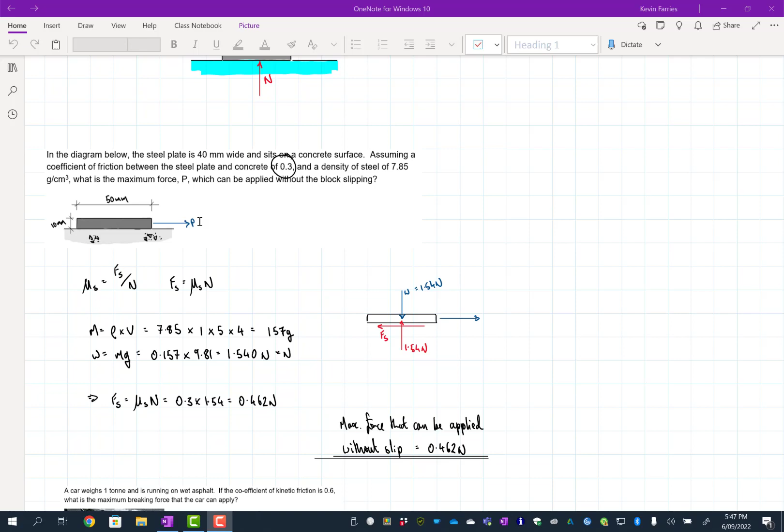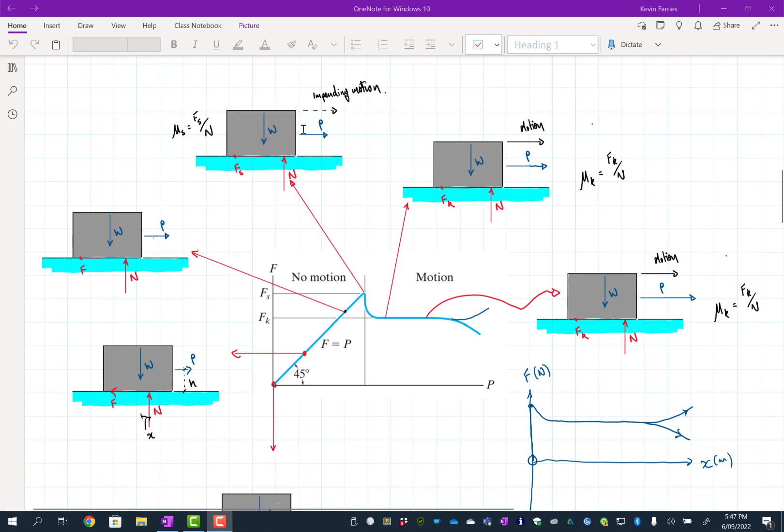So in the examples we've looked at so far, for example, when we're considering this problem where you're applying a little bit of a load and increase that load and look at what happens to the friction force that's resisting that load to keep it in static equilibrium, we were looking at a horizontal applied load. Similarly, in this problem here, looking at a horizontal applied load.

What we're doing here is we're looking at a situation where we've got an inclined applied load. Now, it could be pointing downwards, could be pointing upwards, but either way, it's going to change this normal force. So if you had a force that was pointing upwards - if we had, rather than this downwards force, we could add an upwards force. What we'll find is that's going to reduce this normal force, and a downwards force is going to increase this normal force.

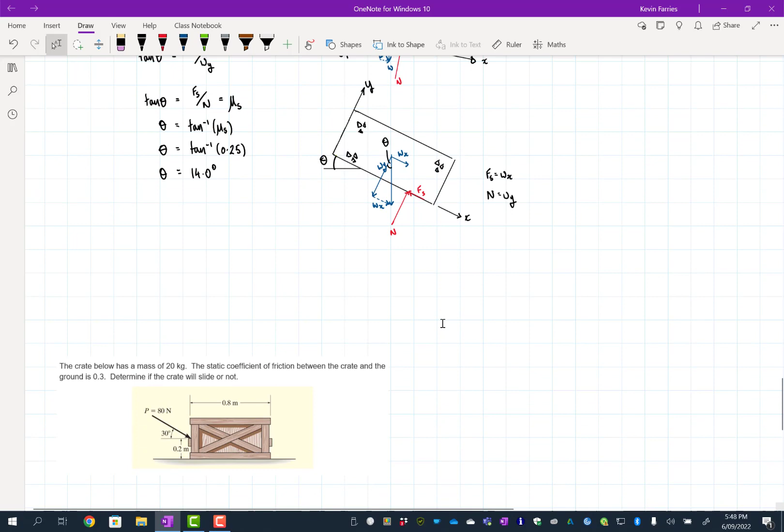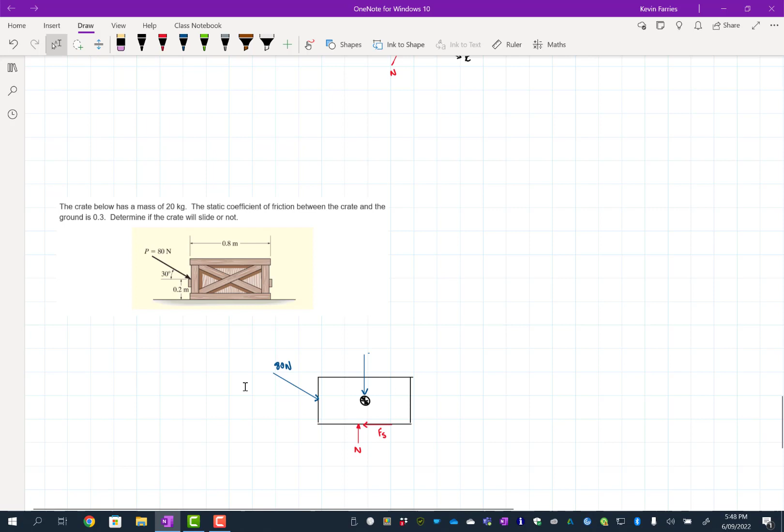So what we have to do in these situations, we have to look similar to what we did here, except a little bit simpler. We have to look at what are the components of this applied load normal to this surface and aligned with this surface. And so let's have a look at that in this case.

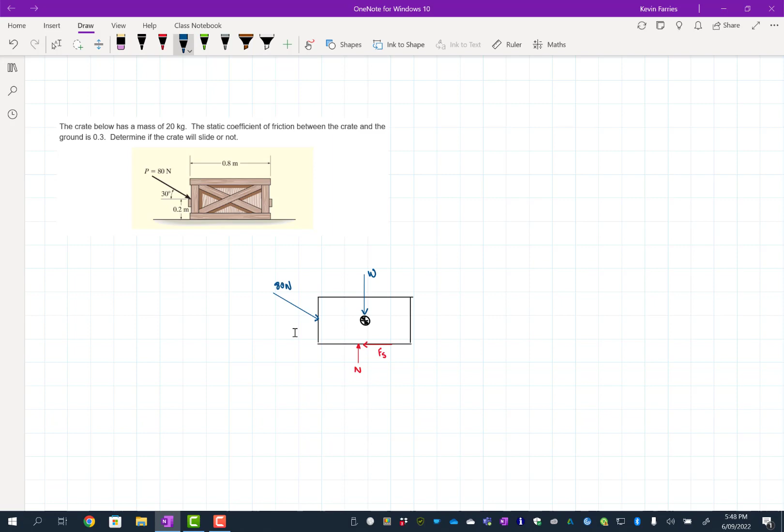So we still got a weight component. So let us do that. So we're told, so let's just call this W. So we're told that the crate has a mass of 20 kilos. Let me just check I'm 100% zoomed. So therefore we're going to get our W is going to be equal to mass times gravity, which is equal to 20 kilograms times 9.81, which is going to be 196.2 newtons.

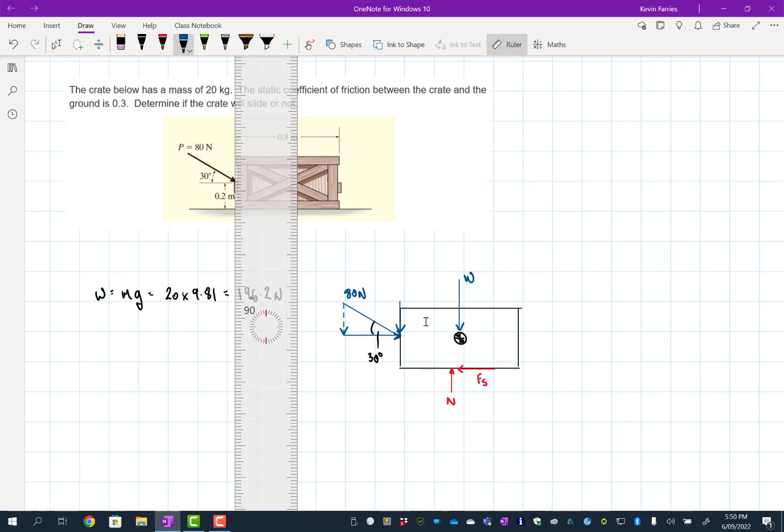Now, so we know what that force there is. Then we're going to think about this force here, and it's going to have two components. And so it's going to have one component that's acting horizontally, parallel to the surface, so like so. And we know that that angle is 30 degrees. Just think about where I'm going to put that so it doesn't get in the way. So that's going to be 30 degrees. And we're also going to have, if we're doing nose to tail, so we must have a vertical component here as well, like so. But its actual point of application will be over here. And this would be, let's have a think, what do we want to call that? We'll call this PY and PX.

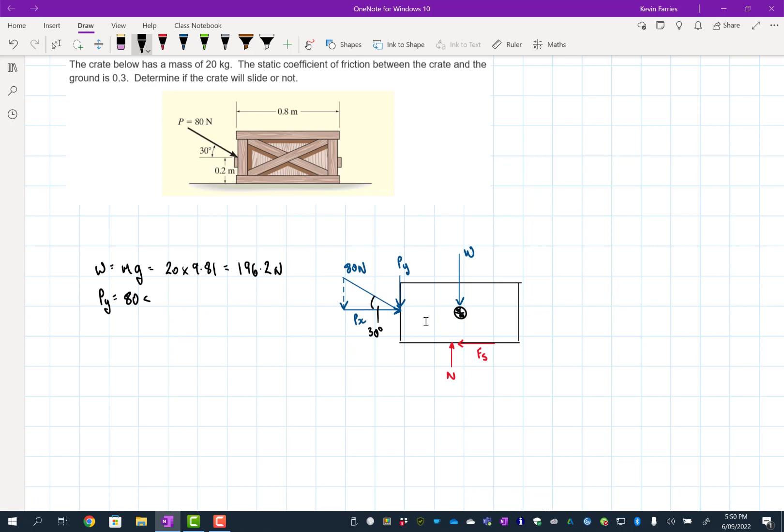So then let's just figure out what those would be. So PY is going to be sine 30, so it's going to be 80 newtons sine 30 degrees, which is just going to be 40 newtons, and it's going downwards. And then Px is equal to 80 cos 30 degrees, which is just equal to 69.28 newtons, and it's going left to right.

Just check those. Just take the square root of the squares of those just to make sure. So square root of 40 squared plus 69.28 squared is equal to 80. Okay, so we've got those okay.

Now what do we have to do next? So what we're trying to do is we're trying to figure out whether this is going to slip or not. Until - let's grab that drawing again. Here it is.

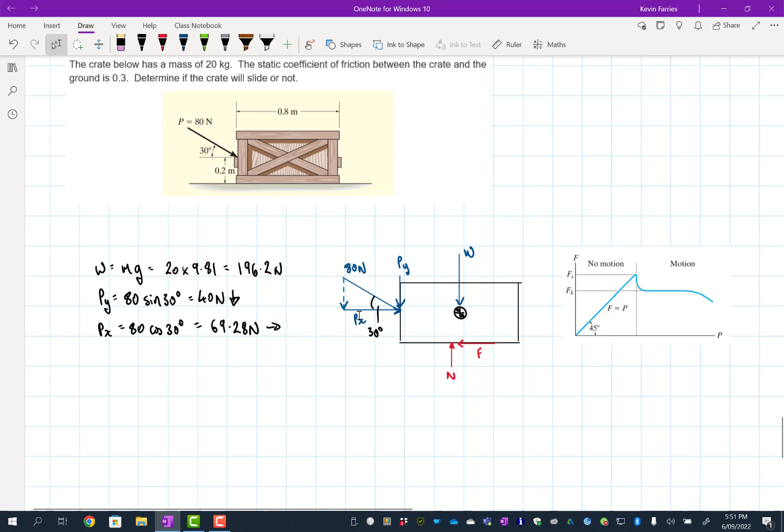I shouldn't really call this Fs, we should just call this F for now. So we're going to get some frictional force F. For static equilibrium, we're not worrying about moments yet (that's the next example, I promise), but we do need the sum of the x components of force equal to 0. So Px, going in the positive direction, minus F equals 0. So the force is just equal to Px, the magnitude of this force.

And so that must be equal to 69.28 newtons for static equilibrium.

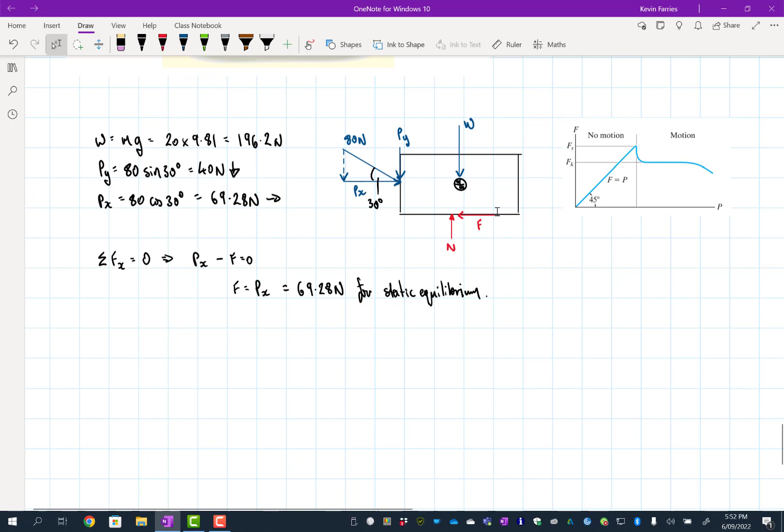Now then what we can do is figure out what this Fs would be, the limiting value of that friction for the normal force we've got here. We can figure out this normal force because we must also have the sum of the y components equal to 0. So let's see what we've got here: we've got Py down the way.

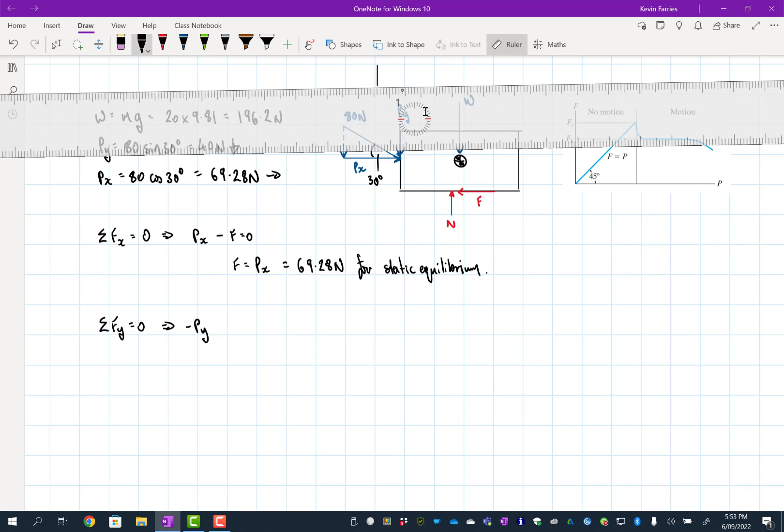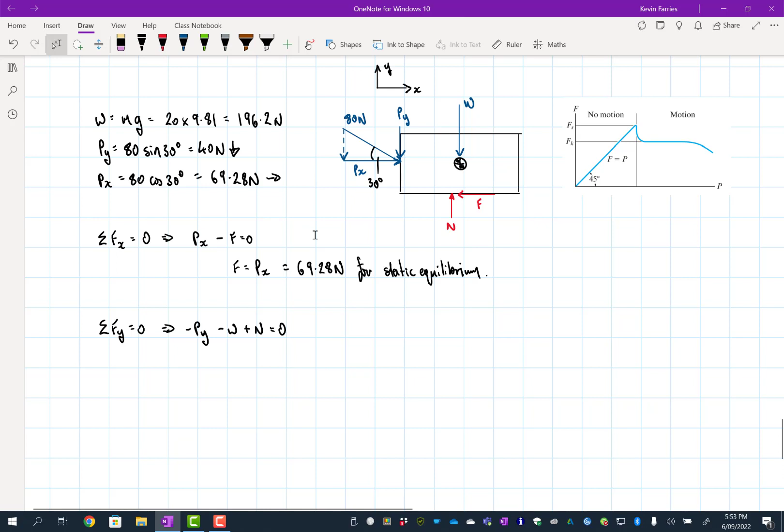So we've got Py, and let's say it's negative. We could decide which way to put our x and y axes, but let's just keep them standard so people know what we're talking about. So x positive that way, y positive that way. And so we get negative Py, negative the weight, plus n equals 0, and I think that's all the y components. That's why I drew this one dashed, so I wouldn't do it twice.

So therefore the normal force is just equal to Py plus the weight, which is just equal to 40 plus 196.2, which is 236.2 newtons up.

Then we can figure out this limiting value of friction, because that is just equal to Fs equals the static coefficient of friction times the normal force. The static coefficient was 0.3, so 0.3 times 236.2 equals 70.86 newtons. Now that's the limiting value of friction for this normal force.

The normal force is higher than just the weight because we've got this force pushing down the way. That adds a downwards component onto this crate, and therefore your normal force increases a little bit. So for that normal force, it's 236.2 newtons. The maximum frictional force, you just multiply the normal force by the coefficient of friction, is 70.86 newtons. The force we need for static equilibrium is 69.28 newtons.

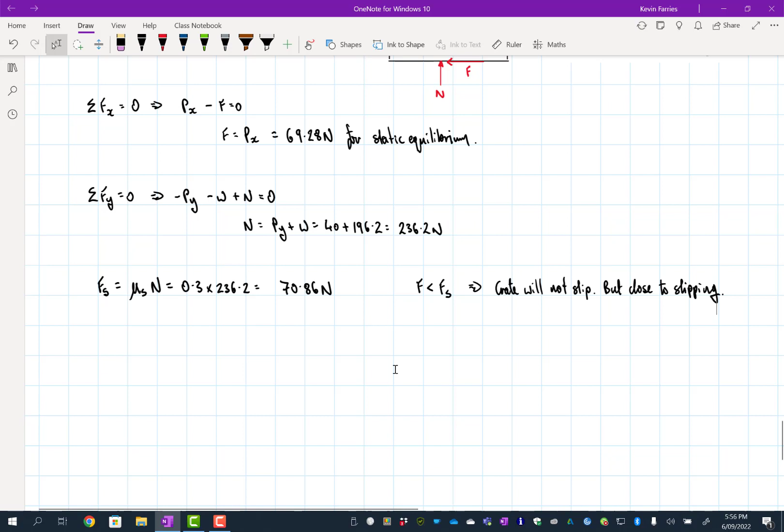So it would just be in static equilibrium. If the frictional force we need is less than the static friction, which is the maximum friction you can get for that normal force, therefore the crate will not slip. But we could say it's close to doing so — very close to slipping, so just a little bit more force and it would slip. Okay, so that's that one there.

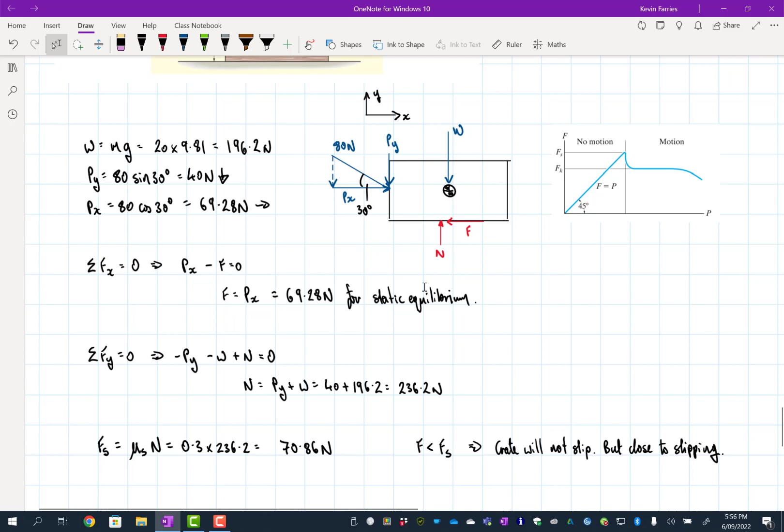Now if this force was the other way up, we'd end up with a Py component upwards, and so we'd end up reducing n, in which case it would definitely slip. If this was 80 newtons and 30 degrees upwards, then it would definitely slip. And what did the question actually ask? Determine if the crate will slide or not — so we've done that. The crate will not slip or slide, but it's close to slipping, so we just underline our answer.

We're done. Okay, let's look at one more example, and this time we are going to think about the moments and whether it's going to tip or not.